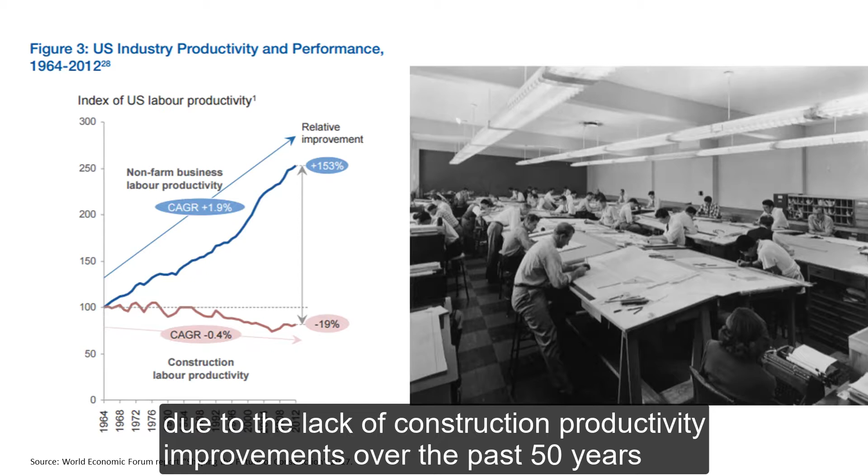There is a risk that the demand for new buildings and infrastructure will not be met due to the lack of construction productivity improvements over the past 50 years compared to other industries. A recent study from McKinsey that looked at industries' move to digitization showed manufacturing near the top at 3.3% investment, but the study put construction close to the bottom at 1.2% investment.

Based on Construction Intelligence Center construction output for civil infrastructure, total infrastructure spend will total over $10 trillion for the next 5 years. Of this, 50% will be in roads and highways and approximately 25% for each rail and other, such as airports, ports, dams and inland waterways.

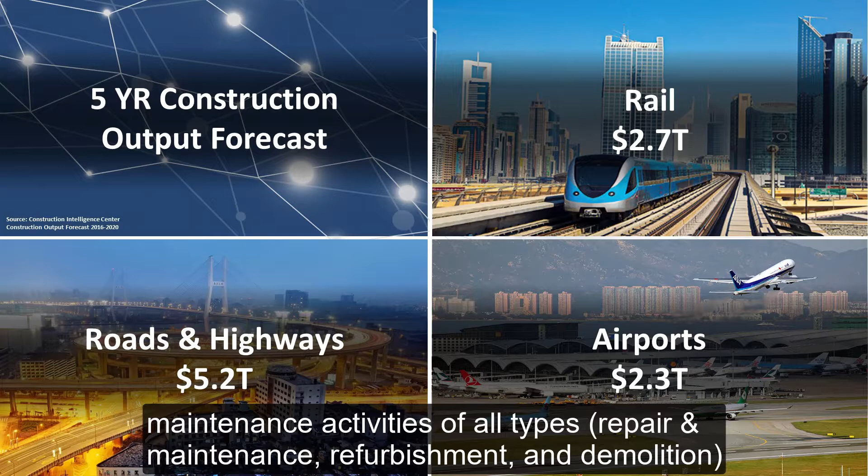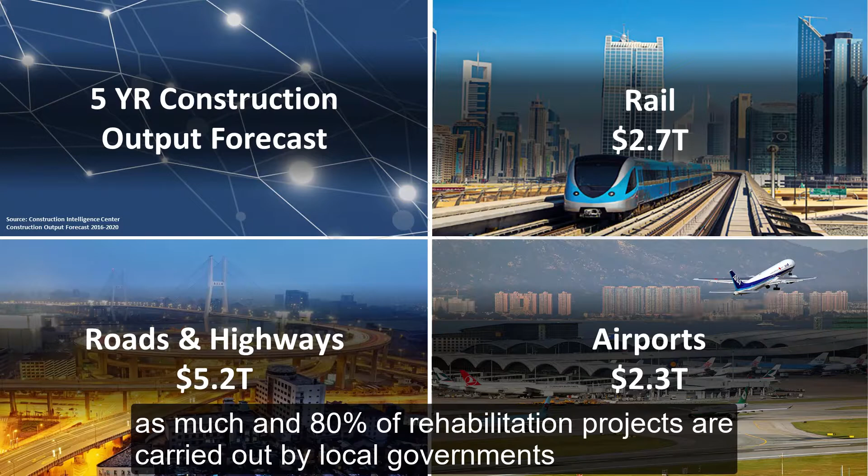And within these transportation projects, new construction continues to outspend maintenance activities of all types: repair and maintenance, refurbishment and demolition. Even though the majority of spend occurs on new construction, there is a much higher volume of rehabilitation type projects. In the US, for example, new construction projects have 4 times higher value than rehabilitation projects, but rehabilitation projects occur twice as much, and 80% of rehabilitation projects are carried out by local government.

Add to this the unrelenting demand. The construction industry is a cornerstone to the industry and overall economy, contributing about 6% of global GDP. That's $10 trillion annual revenues. When you look at a construction site though, it can look like chaos. Projects are complex, in congested areas, and close coordination is required in real time.

The Boston Consulting Group recently estimated that within 10 years, full-scale implementation of digital infrastructure delivery across the asset lifecycle could lead to annual global cost savings of $0.7 trillion to $1.2 trillion in non-residential construction. In the era of connection, the infrastructure design industry has a large opportunity to lead the transition to digitized processes, providing more value to their clients. The solution to the industry's challenges, as well as the business challenges of individual consultancy firms, is BIM.

Building Information Modeling, or BIM, is an intelligent 3D model-based process that equips architecture, engineering and construction professionals with the insight and tools to more efficiently plan, design, construct and manage building and infrastructure.

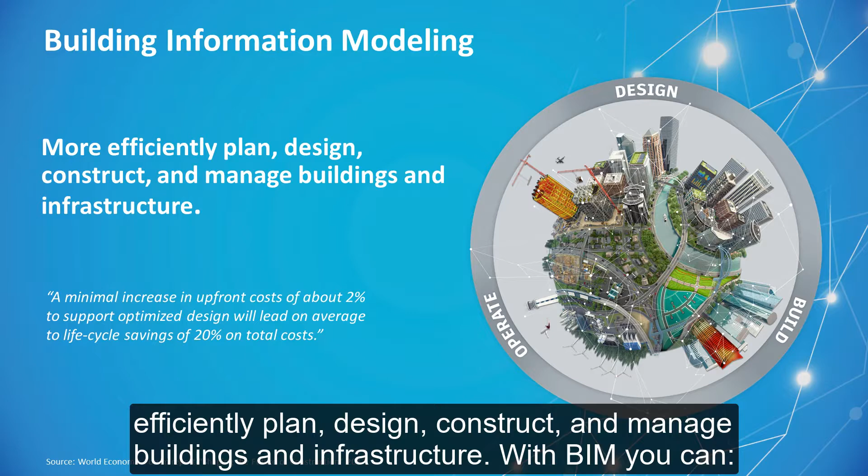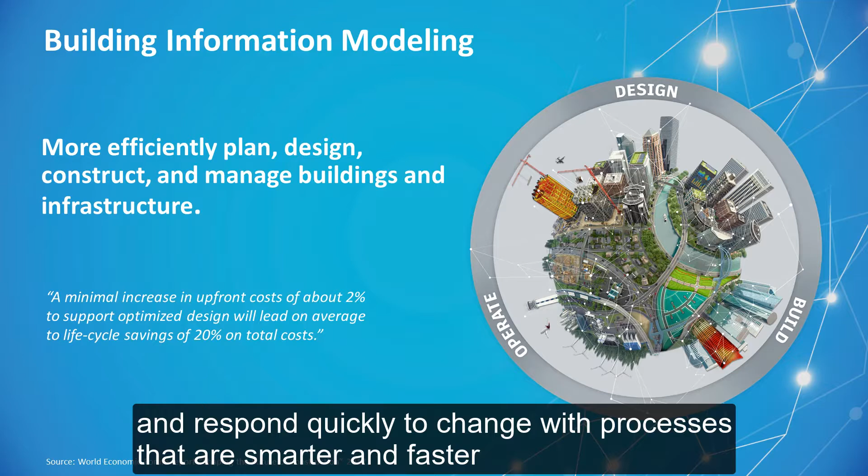With BIM, you can improve project understanding and decision making, share and use the same consistent data across the project lifecycle from your desk or in the field, and respond quickly to change with processes that are smarter and faster. BCG and McKinsey go further in defining what digitization means for the construction industry. It is enabled by fast acceleration of technology trends driven by cloud computing and mobile technology.

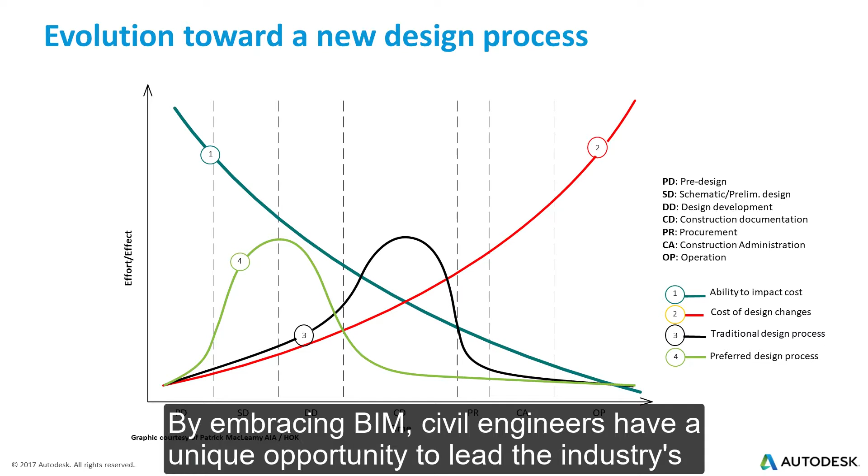By embracing BIM, civil engineers have a unique opportunity to lead the industry's transformation to a more efficient way of working. BIM allows for earlier design insight and decision making, allowing changes to be made when it's less costly. Because BIM automates the production and coordination of much of the construction documentation needed on the project, civil engineers and designers can spend more time on design and less time on tedious, resource-intensive tasks.

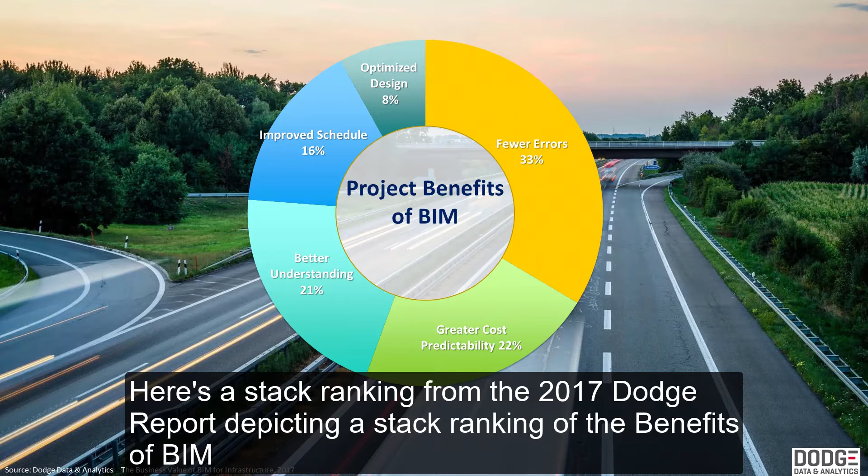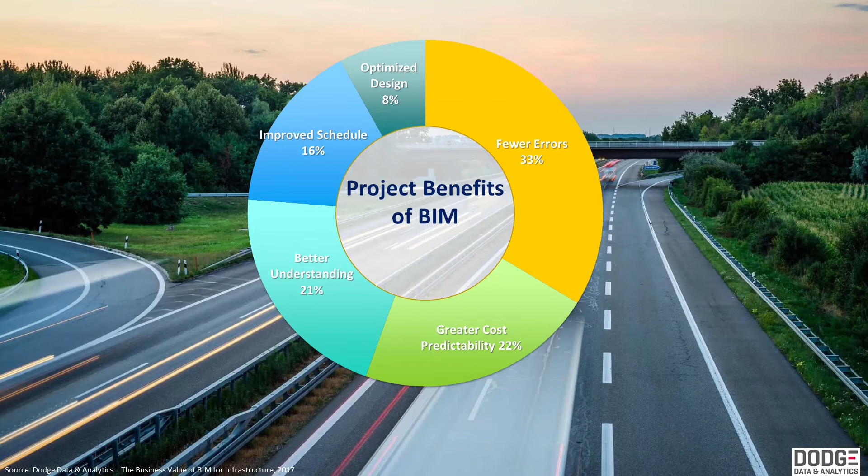Here's a stack ranking from the 2017 Dodge report depicting the benefits of BIM. As we can see, BIM resulted in 33% fewer errors, 22% greater cost predictability, 21% better understanding, 16% improved scheduling, and 8% optimised design. In addition, BIM can help civil engineers address business challenges you are facing today.

This includes winning new work, including meeting client demands for BIM deliverables, participating in alternative project delivery models, and effectively communicating design intent to earn stakeholder buy-in. Deliver higher quality designs. This means improved building performance via analysis tools and using visualizations and VR to experience your designs before they are built.

Work more efficiently. This includes reducing errors and change orders, improving collaboration with engineers and contractors, and staying on time and within budget. And finally, expanding billable services, including extending services beyond design and into building operations with model maintenance. Also, recast advisory relationships with clients to deliver long-term value to assets.

These industry trends create specific business challenges for civil engineering firms, including winning and retaining work, expanding billable services, increasing project complexity, meeting sustainable design standards, increasing demand for BIM, and hiring and retaining talent. Traditional 2D practices and siloed ways of working are no longer sufficient, and there is a growing recognition of the need for transforming how work gets done. Increasing BIM adoption by contractors, owners, and for infrastructure projects is evidence of this shift.

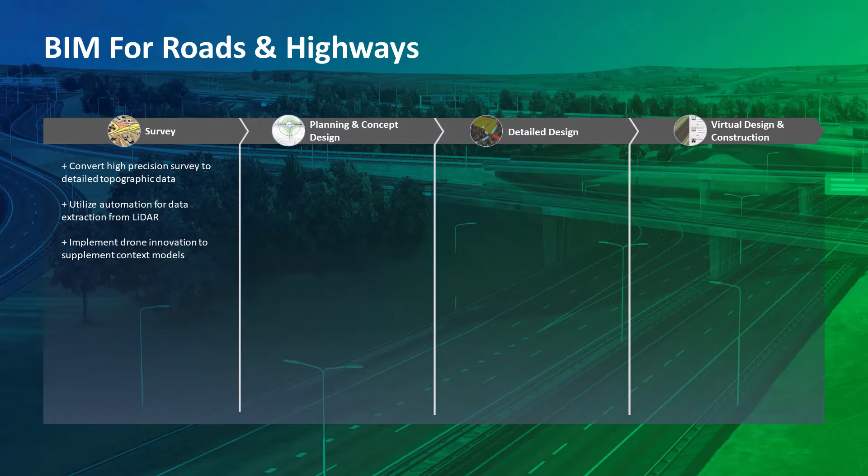Let's now take a look at different phases or aspects of an infrastructure project and how the Autodesk AEC package can help you, starting with surveying. By adopting BIM for surveys, engineers can convert high-precision surveys to detailed topographic data, utilize automation for data extraction from LiDAR, and implement drone innovation to supplement context models. Leveraging high-precision survey collection from GPS and total stations to build out existing conditions to begin the design process in Civil 3D. This is the first step to designing in context.

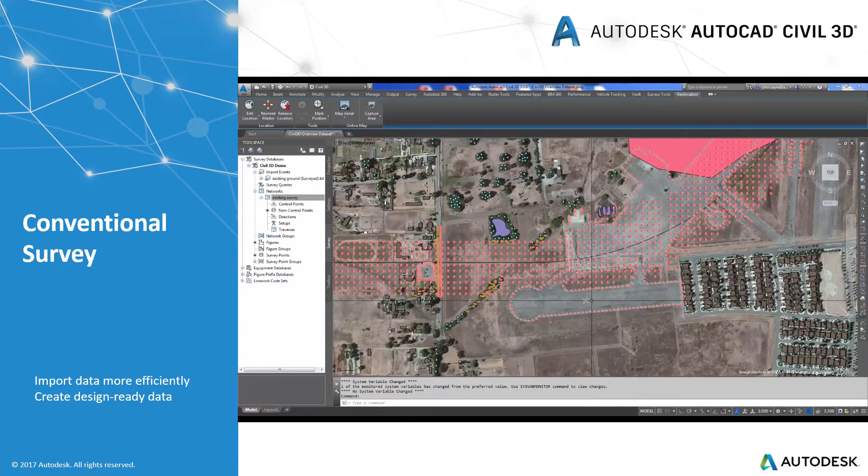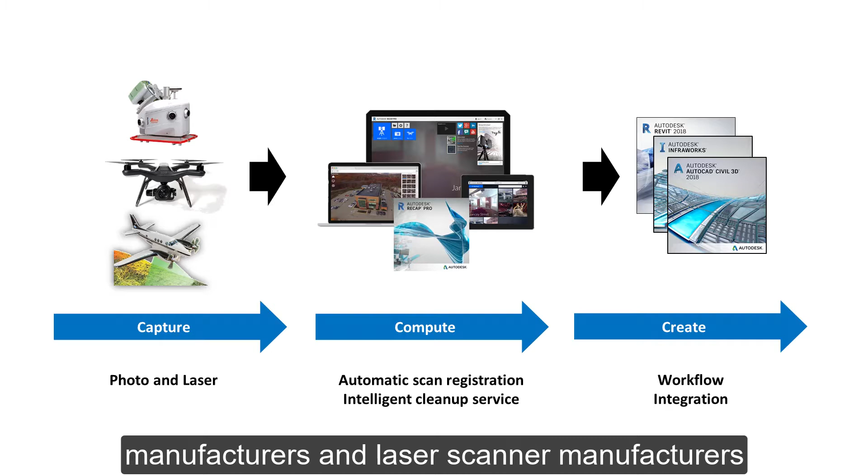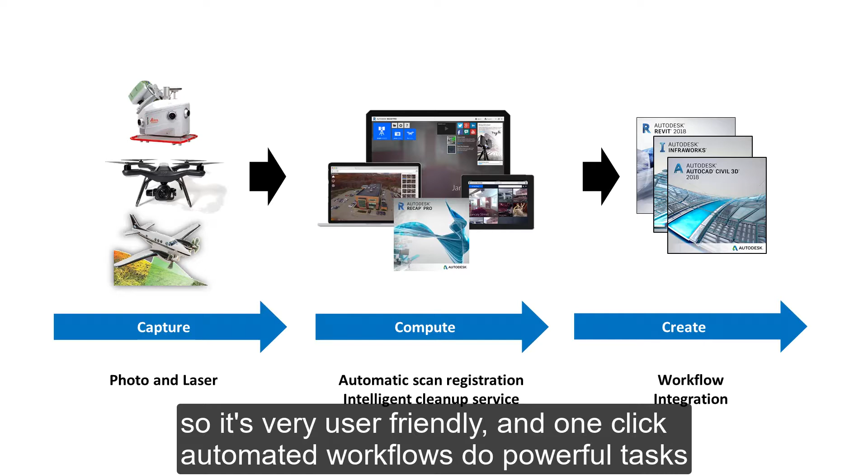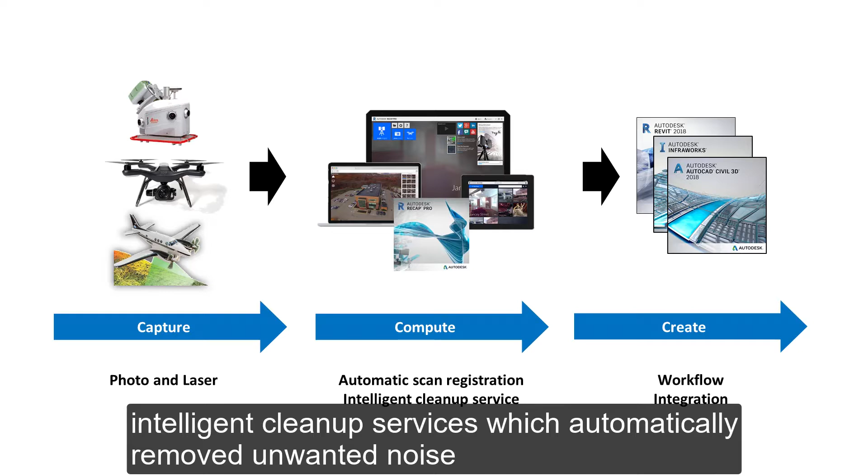Autodesk has created a powerful and easy-to-use workflow for reality capture in order to bring you a scan-to-BIM workflow. Autodesk has partnerships with every major hardware vendor, including both UAV drone manufacturers and laser scanner manufacturers. ReCap Pro has been designed for use by someone with no previous experience, so it's very user-friendly, and one-click automated workflows do powerful tasks like scan registration, which stitches multiple scans together into one point cloud, and intelligent cleanup services, which automatically remove unwanted noise.

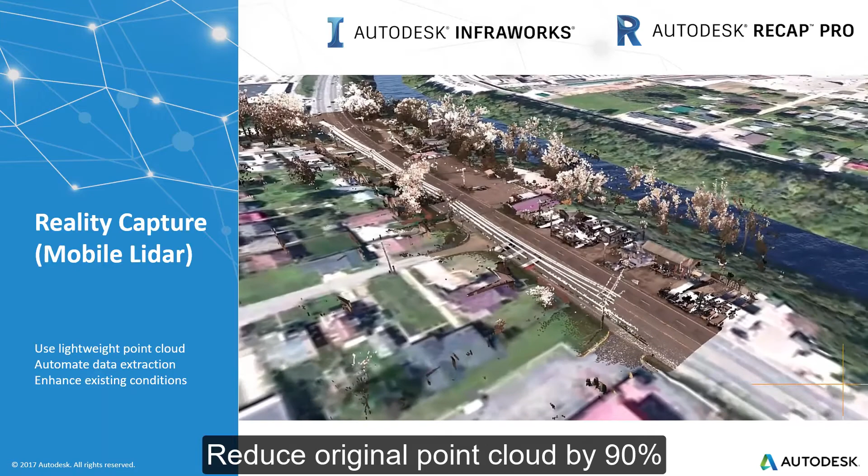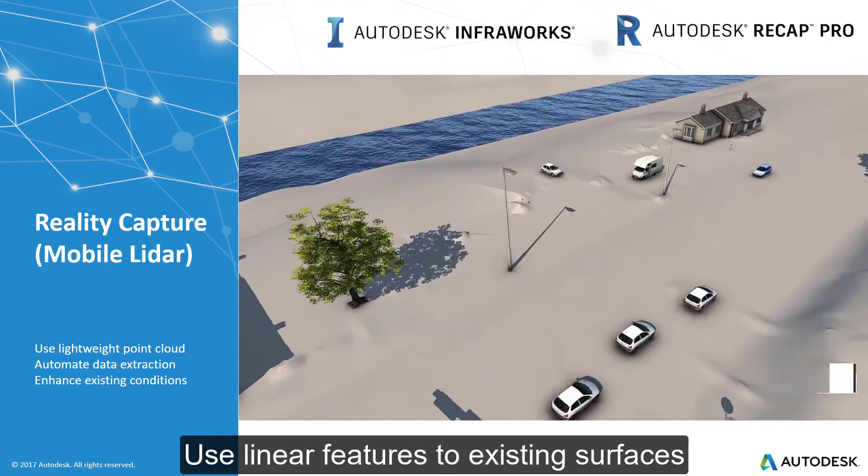Perhaps most importantly, ReCap integrates with all of Autodesk's key AEC design creation tools, so you can bring that reality data into the design creation tool of your choice, including lightweight point cloud, which reduces the original point cloud by 90%, automated data extraction of bare earth terrain, vertical point features and linear features, and enhancing existing conditions by applying linear features to existing surfaces.

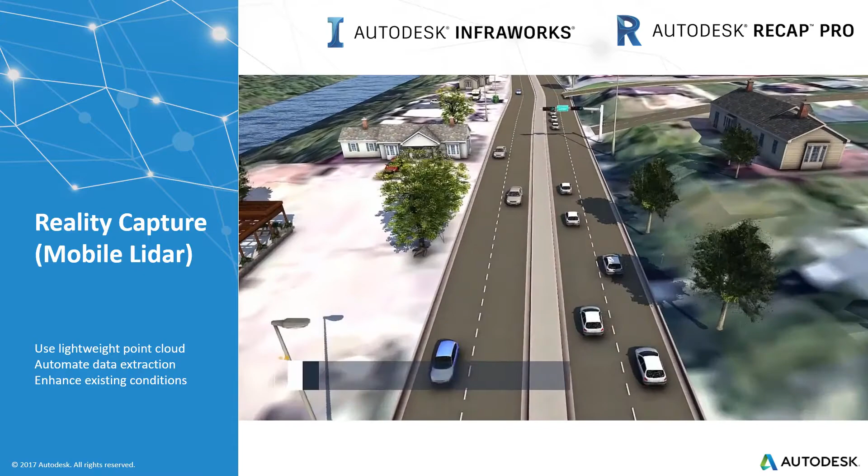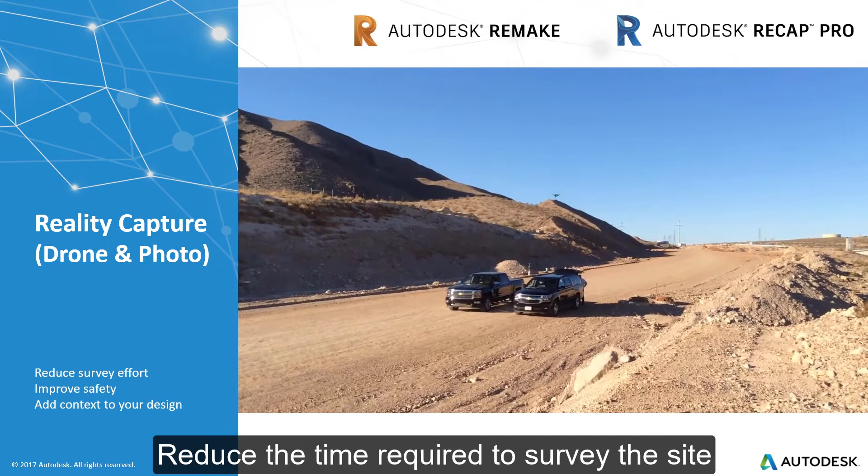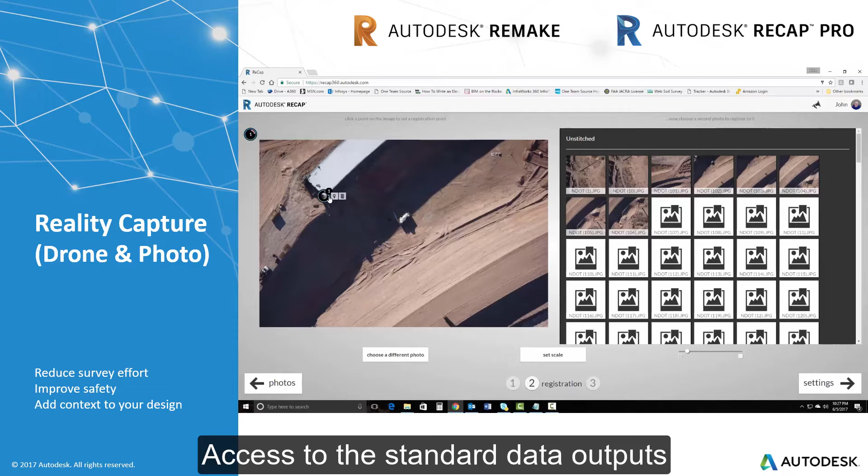Reduce survey effort. Reduce the time required to survey the site. Minimize the size of your survey crew. Improved safety with new methods of data collection. Limit crew activity on active construction sites. Add context to your design. We're the one-stop shop to manage your data. Quicker with cloud-based processing. Access to the standard data outputs, and the quality and format you need so you can begin your design.

Now let's take a look at how BIM and the AEC Collection can help you at conceptual planning. Aggregate data to create project context. Develop parametric roadway, bridge and drainage designs. Evaluate design alternatives. Perform analysis to optimize designs. And finally, communicate your design with videos and renderings.

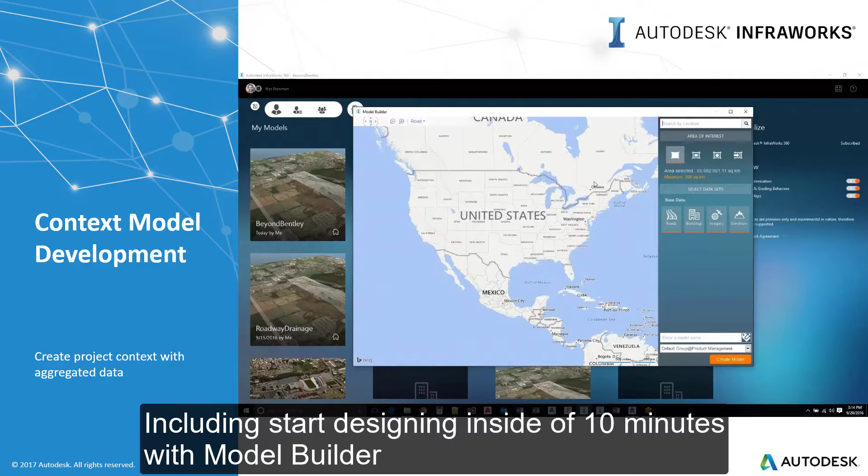Create project context with aggregated data, including starting designing inside of 10 minutes with Model Builder. Aggregate terrain, aerial photos, GIS, CAD and BIM. Get started quickly with the ability to add more detail as needed.

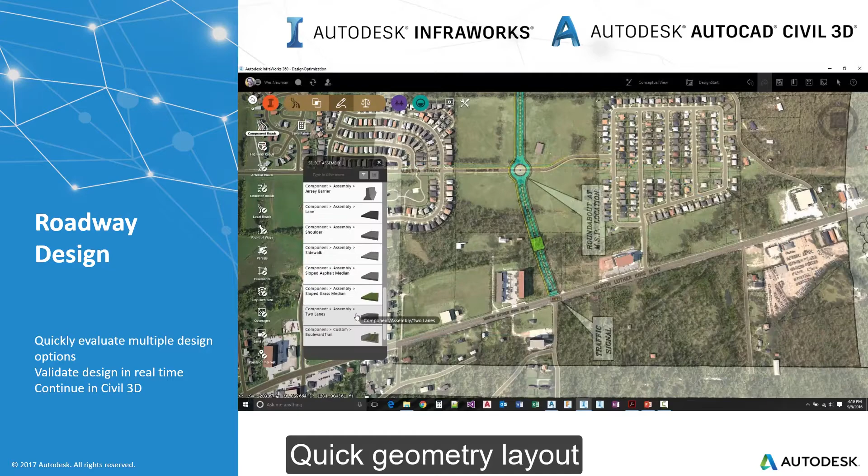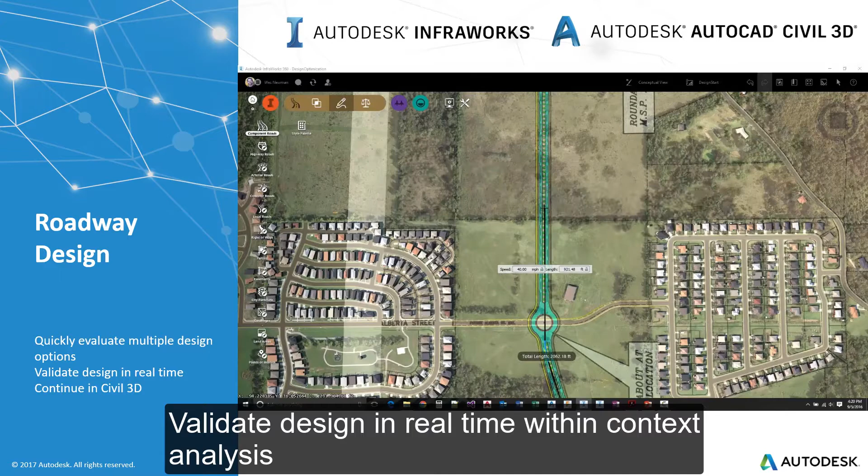Quickly create and examine multiple design options earlier in the process. Quick geometry layout, intuitive model-based design, turning lanes, intersections versus roundabouts. Validate design in real time with in-context analysis. Dynamic quantities provided in real time. Profile optimization, intersection design, traffic simulation, and superelevation.

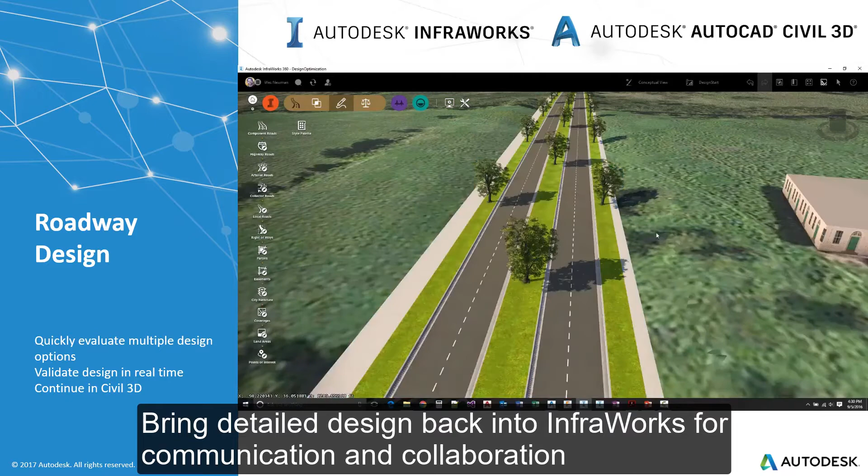Continue design in Civil 3D. Import InfraWorks model to Civil 3D. Continue detailed design and documentation. Bring detailed design back into InfraWorks for communication and collaboration.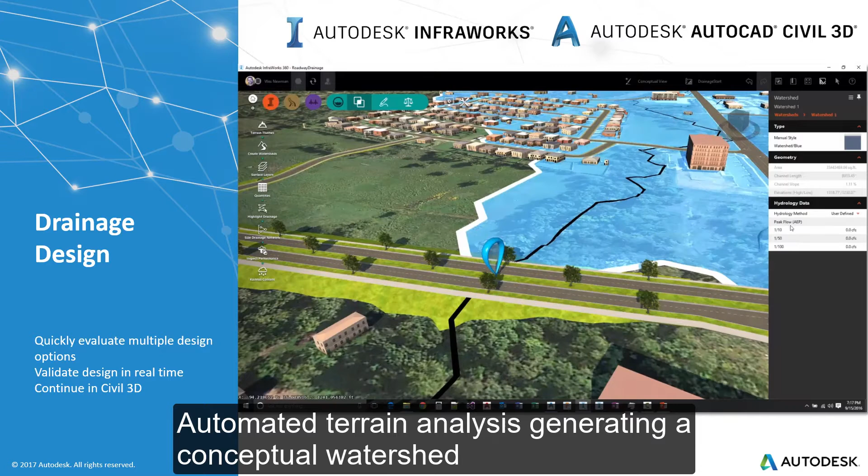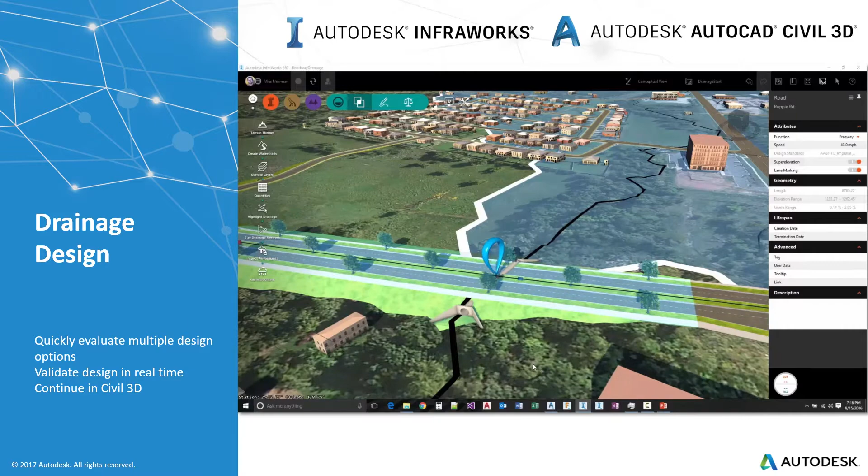Quickly evaluate multiple design options through simplified watershed analysis, automated terrain analysis generating a conceptual watershed, automated culvert location and sizing based on user-defined criteria, automated placement and sizing of inlets and pipes for closed drainage, dynamic quantities provided in real time.

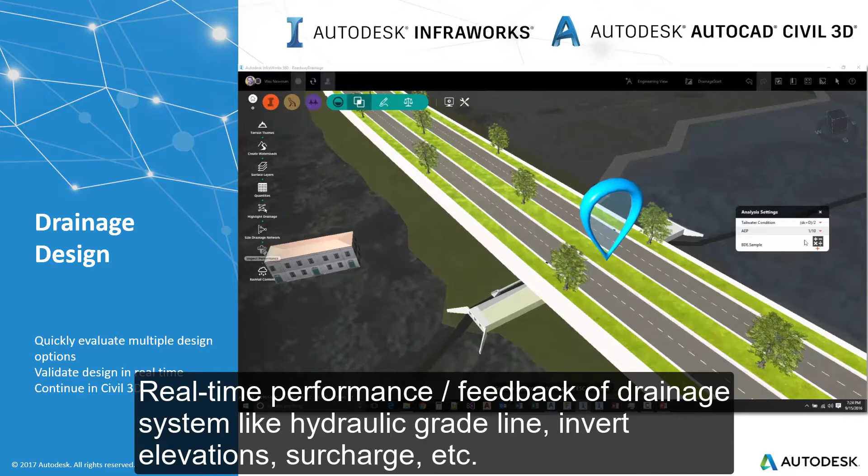Validate design in real time, integrated design and analytics process, real-time performance feedback of drainage systems like hydraulic grade line, energy grade line, invert elevations, surcharge, etc.

Import InfraWorks model to Civil 3D. Continue in Civil 3D Storm and Sanitary module which understands InfraWorks model elements. Continue detailed design and documentation. Bring detailed design back into InfraWorks for communication and collaboration.

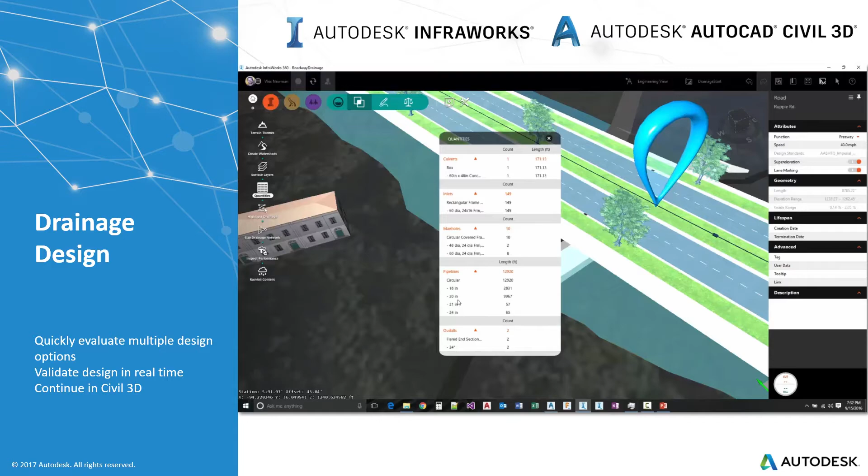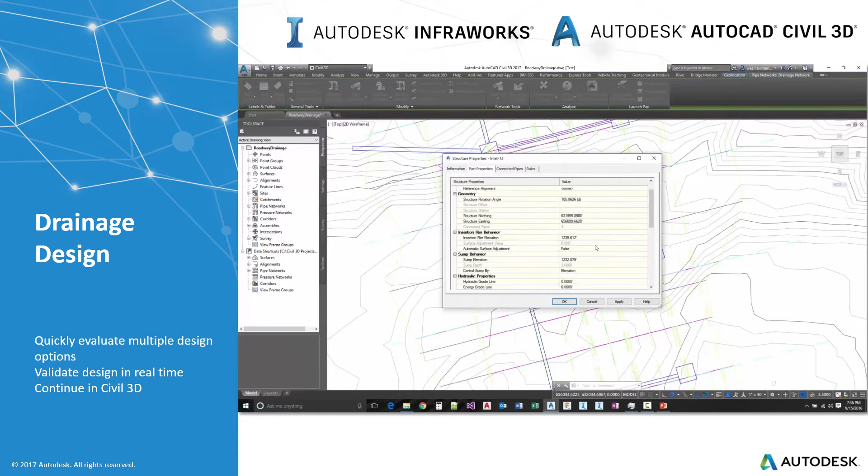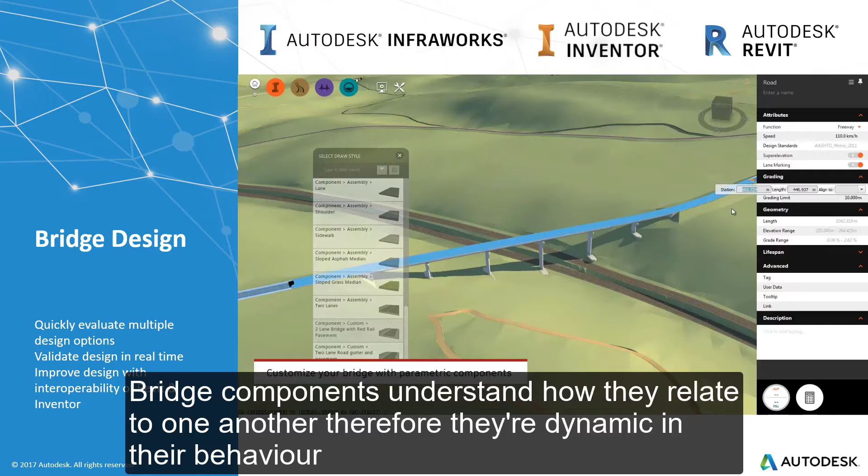Enhanced interoperability brings Revit and InfraWorks together to perform more efficient parametric bridge design. Quickly evaluate multiple design options. Within InfraWorks, dynamic and intuitive layout of the bridge, automated design of components such as superstructure and substructure with parametric controls. Bridge components understand how they relate to one another, therefore they're dynamic in their behavior. Library of bridge components included with all the parametric controls required.

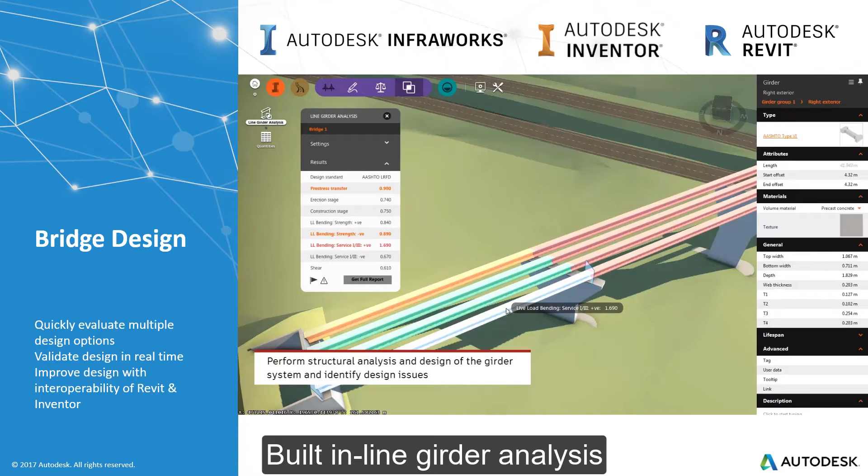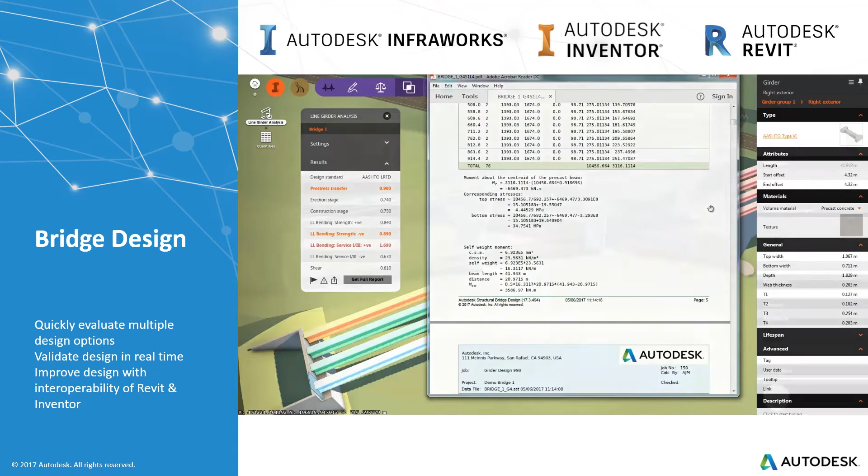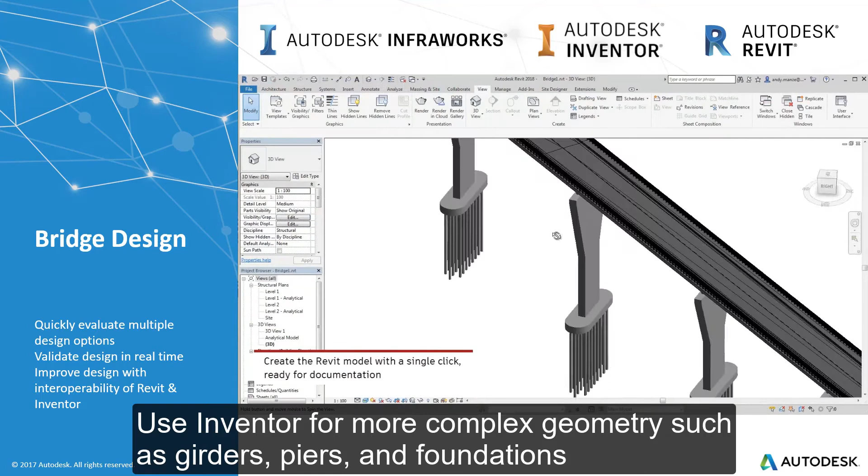Validate design in real time, dynamic quantities provided in real time, built-in line girder analysis, interoperable with Revit and Inventor. Use Inventor for more complex geometry such as girders, piers and foundations. One-click push to Revit. Family support enables Revit functionality.

Now let's have a look at how BIM and the AEC Collection can help you with your preliminary and detailed designs. Design in a dynamic 3D model-based environment. Design with contextual rule-based standards. Produce plans that dynamically reflect changes. Collaborate across multidisciplinary design teams. And centralized access to project information.

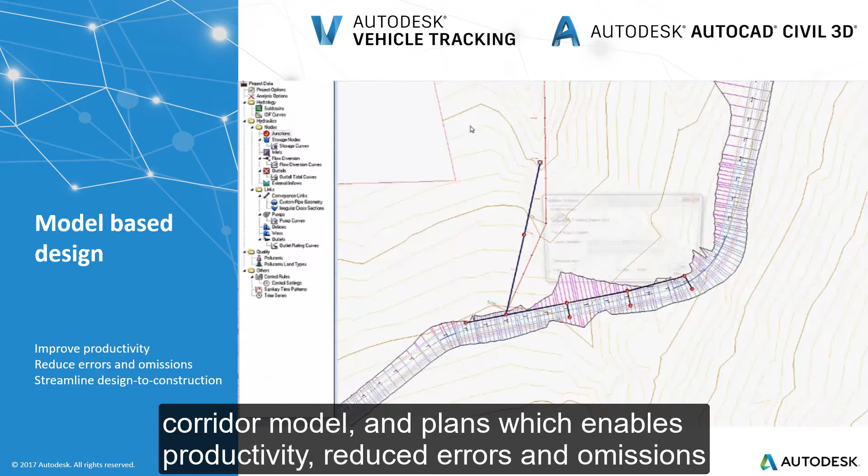Today, many companies have made the move to BIM. Civil 3D in the dynamic model provides an associative relationship between geometry, corridor model and plans, which enables productivity, reduced errors and omissions, and delivering accurate digital data to the field. Improve productivity by moving from 2D to 3D.

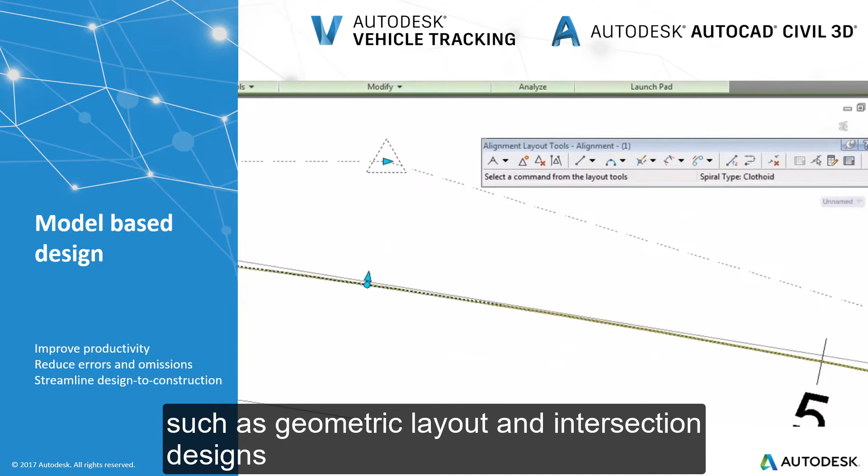Civil 3D dynamic modeling. Perform faster design iterations and streamline time-consuming tasks such as geometric layout and intersection designs. Interoperability with Bentley, Trimble and Topcon.

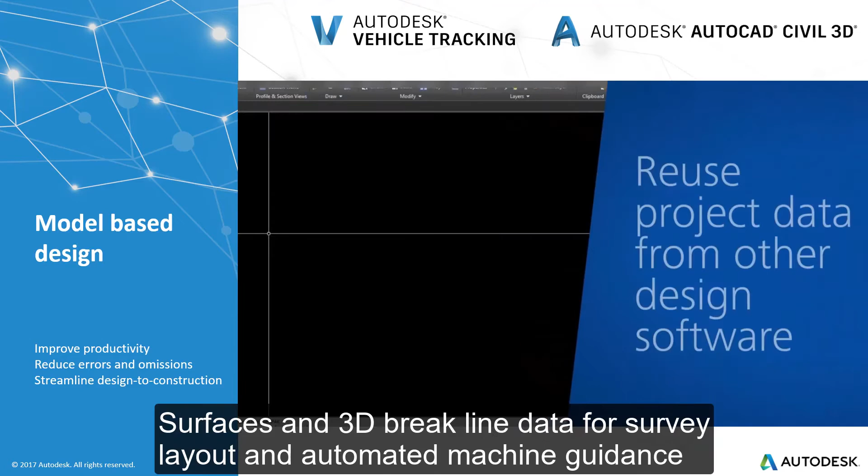Reduce errors and omissions. Associative labeling and annotation, standards checking, drainage analysis, design analytics and clash detection. Design to construction, quantities, reports, surfaces and 3D breakline data for survey layout and automated machine guidance.

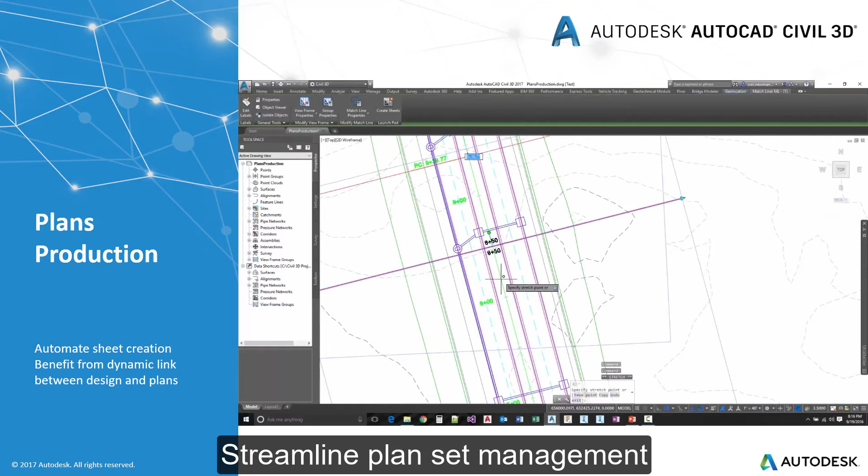Automate sheet creation. Create plan, profile and cross-section sheets, dynamic view frames, dynamic match lines, dynamic link between design and plans, dynamic labeling on sheets, streamline plan set management.

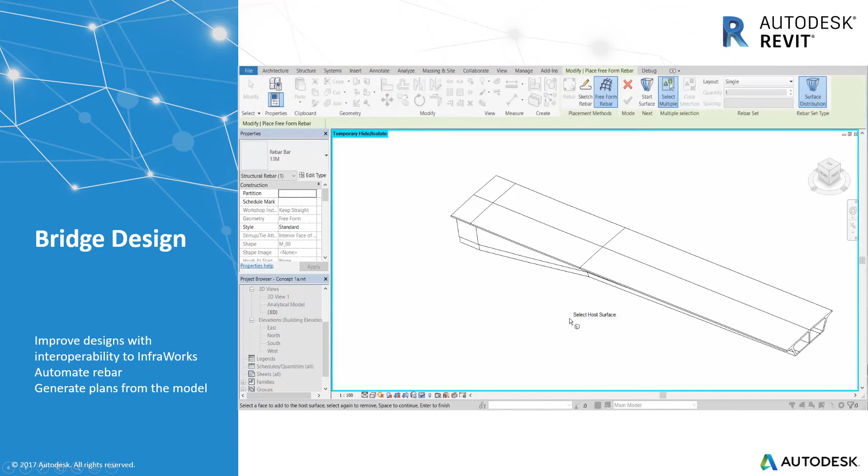Interoperability. Downstream interoperability from InfraWorks facilitates reinforcement, detailing and documentation. Reinforcement. Place rebar into non-linear shapes. Plans generated from the model. Create more accurate, detailed documentation of concrete bridges and structures. Model elements are direct representations of information from the Revit model.

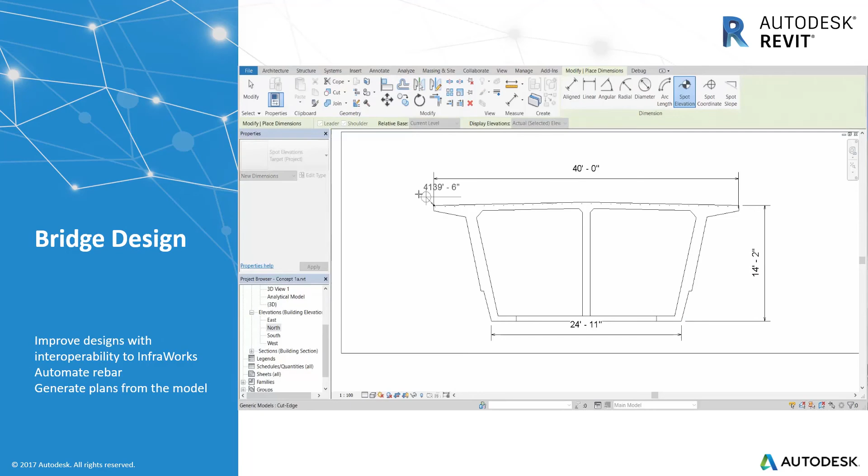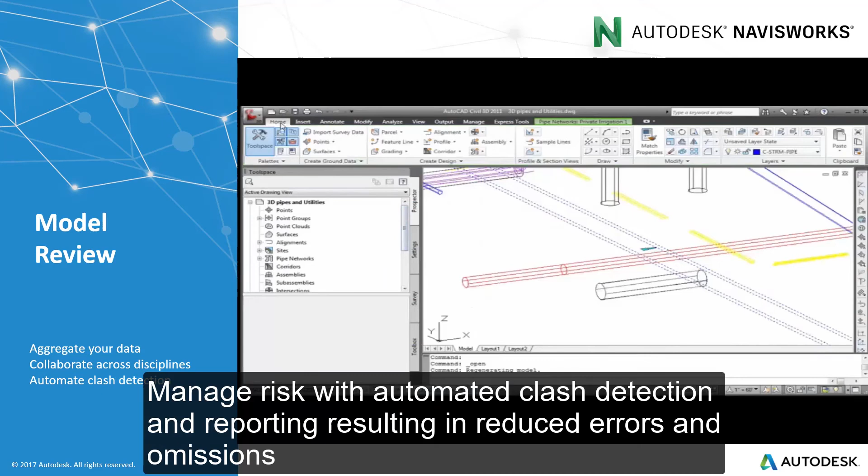And finally, let's look at the benefits gained from virtual design and construction. Perform model review, clash detection and collaborate. Create 4D and 5D simulations and communicate the project to owners and stakeholders. Navisworks allows you to aggregate over 50 file types from all major software vendors. Collaborate across disciplines with interdisciplinary coordination and constructability review. Manage risk with automated clash detection and reporting, resulting in reduced errors and omissions.

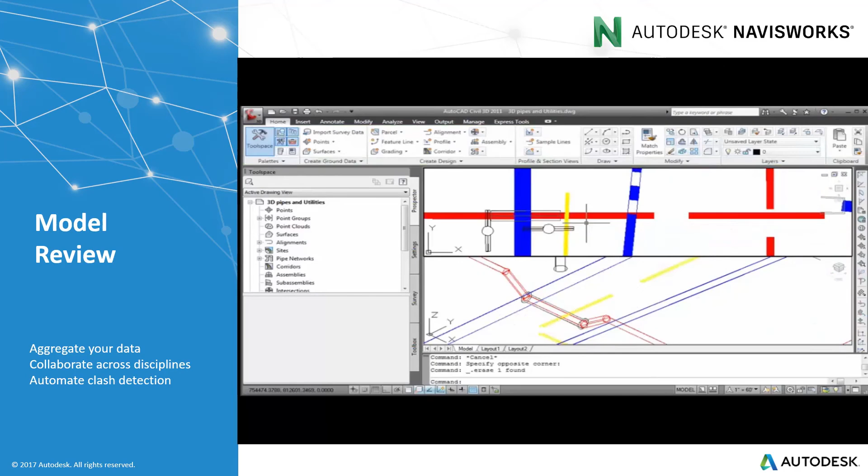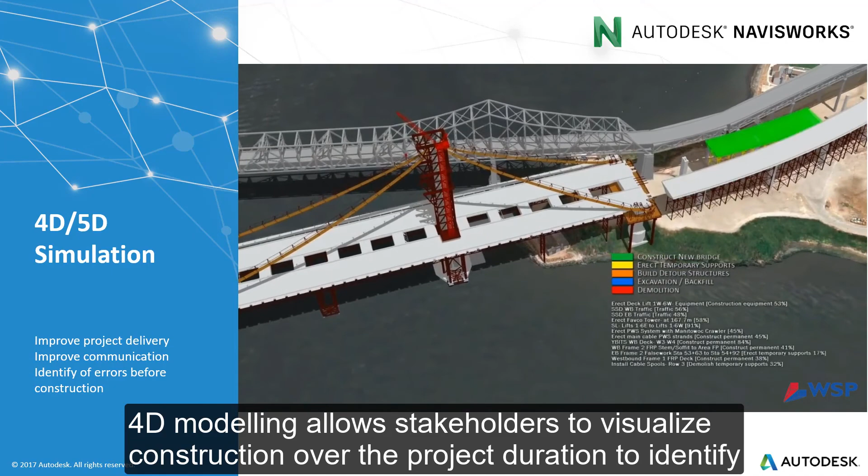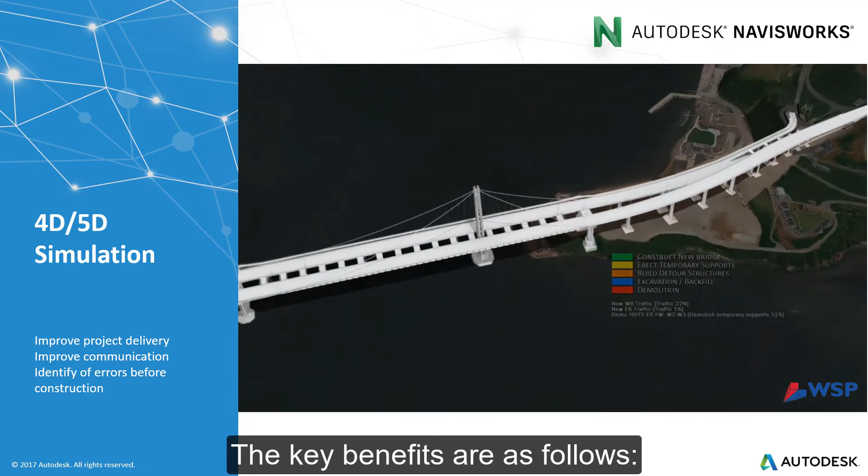4D modelling allows stakeholders to visualise construction over the project duration to identify potential spatial or temporal conflicts in schedule. Adding a cost component to the process creates a fifth dimension, making a 5D model. Such 5D engineered models allow stakeholders to evaluate costs and model cash flows for each phase of construction. The key benefits are as follows: improved project delivery, improved communication, enhanced identification of errors, and improved visualization.

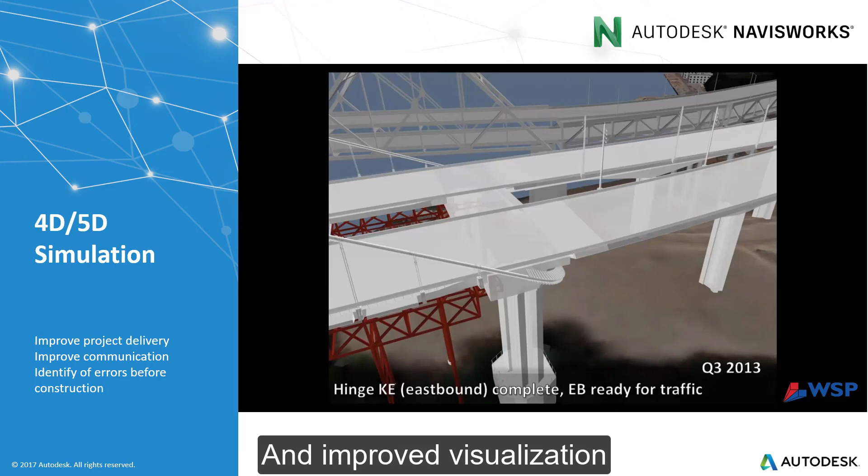What we've covered in this video merely skims the surface of what the Autodesk AEC Collection has to offer. How will you use yours?